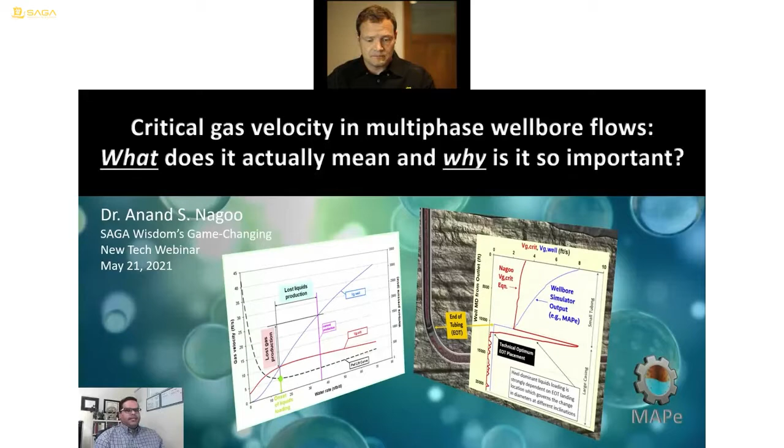Today I'd like to share some fairly deep insights into a topic I've been in love with for quite some time now, critical gas velocity, and focus on some key multi-phase flow concepts that I believe is missing in the current understanding of critical gas velocity modeling. Hence the title, what does it actually mean and why it's so important. I'd also like to thank SAGA Wisdom for selecting us as part of their game-changing tech.

For the first part of the talk, I'd like to focus on what are some common misconceptions about critical gas velocity. Then I'll transition into why this improved understanding is important, and conceptualize and validate our understanding with some key experiments and field data validations. Finally, I'd like to introduce you to the tool that does all of these calculations of multi-phase flow, these automated production calculations of multi-phase flow and critical gas velocity and so on, the MAPe tool, and why it's an exponential technology for providing new insights into production optimization workflows.

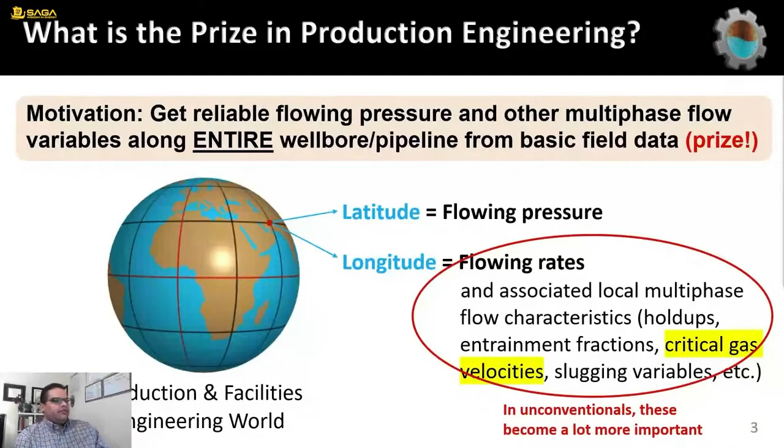What I like to do is step back and look at the prize of what we're trying to do here. In production engineering, we think about this world in terms of the latitude and longitudes of pressure and flow rates. What we're really after is trying to find out that pressure profile along the well, those individual multi-phase flow characteristics along the well. Particularly in unconventionals, we're interested in things like slugging and critical gas velocities and holdups and so on.

But if you really think about what the pressure profile is in a well, it's nothing more than a representation of what you have in the well, the volume fractions of the phases. And all of your flow patterns are just different types of manifestations of what you have there. So the pressure behaviors is governed by the volume fractions, and the volume fractions and the individual phase velocities collectively - that relationship is what we call the well slip behaviors. That's the key thing that's actually causing you to see the different types of flow behaviors in the well, whether it's a slug flow or an annular mist flow or so on. And that's what you see visually represented in your slip, in the types of slip that you have.

Now, the problem is that there's a misunderstanding, in my view, of what's actually happening. When we think about concurrent multi-phase flow, the gas is not actually removing the liquids. What's actually happening is that there's a constant slipping between the gas and the liquids to various degrees, which we call different flow patterns, and we call that holdup. The liquids will be held back due to that slippage in concurrent flow. But in countercurrent flow, when you have partial or full countercurrent flow, you have both slipping and liquids falling back downwards.

That's a key difference because you need to have a deep understanding of the two different types of wellbore slip behaviors, characterized by concurrent flow and countercurrent multiphase flow. This is really where we must start to understand critical gas velocity, because you cannot understand the concepts of liquids flow reversal without understanding the differences between concurrent and countercurrent multiphase flow.

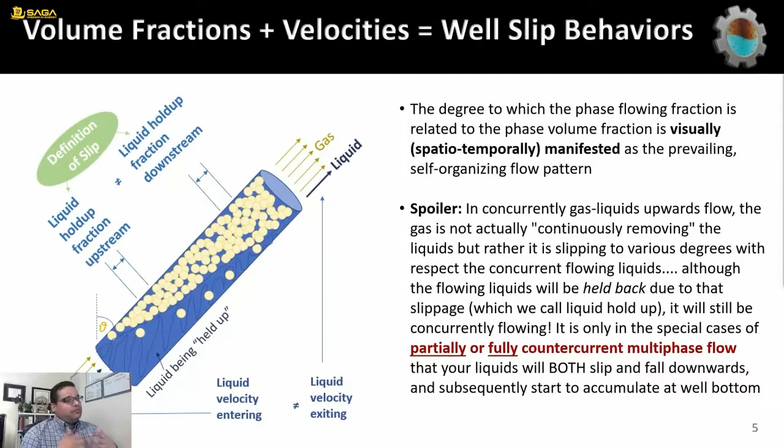There's a large body of literature on both, but we tend to see more of the concurrent part in the petroleum industry. This is what has always been missing before, and it's a key source of misunderstanding.

When we talk about concurrent or countercurrent multiphase flow, we're always talking about liquids accumulation. In concurrent multiphase flow, the liquids accumulate in all sections of your well, and you have this phenomena of the liquids being held back due to slippage. So you have liquids slipping but not falling, with both a positive liquids rate and a positive gas rate. That's how you develop a holdup profile.

But in countercurrent multiphase flow, you have a new phenomenon, because now you have accumulation due to liquids slipping, still holding up, still slipping, but now additionally falling. You're going to be building up a static gaseous liquids column at the bottom of the conduit. And that's really the source of confusion.

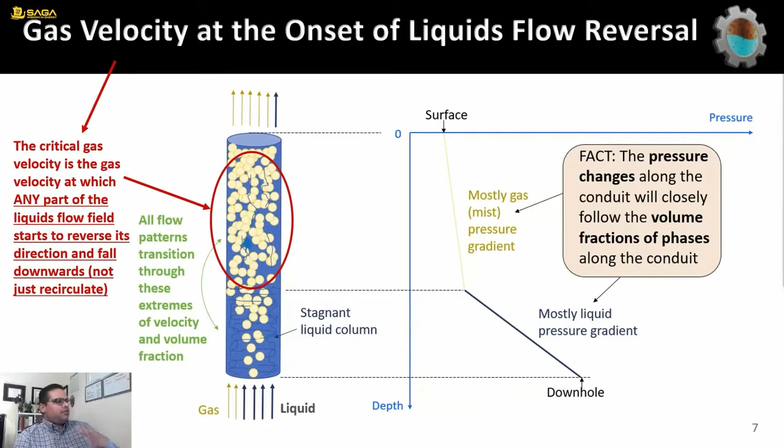So now that we understand that, we can finally come to an accurate definition of critical gas velocity, which is a gas velocity at which any part of your liquids flow field starts to reverse direction and fall downwards, not just recirculate. We're talking about falling downwards. It's a gas velocity at the onset of liquids flow reversal.

But even that is open to interpretation, because what do you mean by any part? If we start from concurrent mist flow and decrease the gas rate, we're going to countercurrent multiphase flow in many different ways. Are we talking about a partial fall in droplet mist? A partial fall in annular? A mixture between? The answer is the critical gas velocity is all of the above.

It's a range. Contrary to popular belief, it's not a departure, but a range. It's not just a point, it's a wide range. It includes all of the starting options for countercurrent flow.

The critical gas velocity depends on the different types of wells you have. For example, a high GLR mist flow well will flow in this regime, but a liquids-rich gas condensate would flow in a partial churn annular flow regime.

The critical gas velocity is the onset, that point just before you transition to zero cross-sectional average net liquid velocity, and then your liquids start to have a net zero velocity, a net negative velocity. All of this happens in multiple ways across a wide range of different transitional flow patterns.

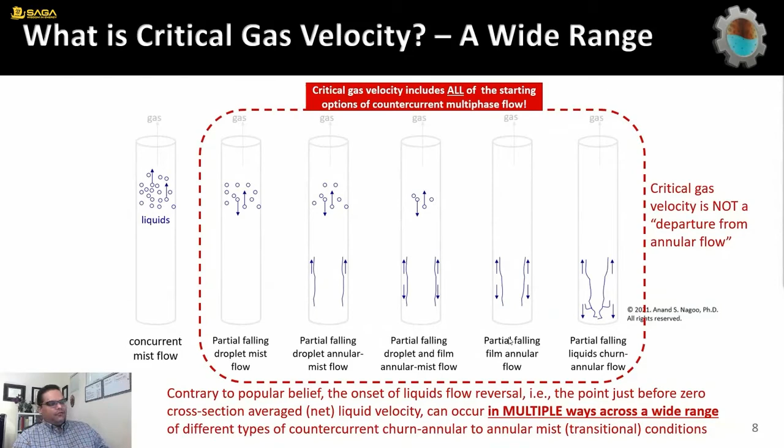That's important because now we can finally understand why we have slow liquid loading in some wells, and sudden, fast liquid loading in other wells. That means we're accounting for the full range of liquids loading, and that's an important differentiation into what we understand by liquids loaded.

The difference in understanding that I created in the critical gas velocity model I have is that we're able to combine that full range.

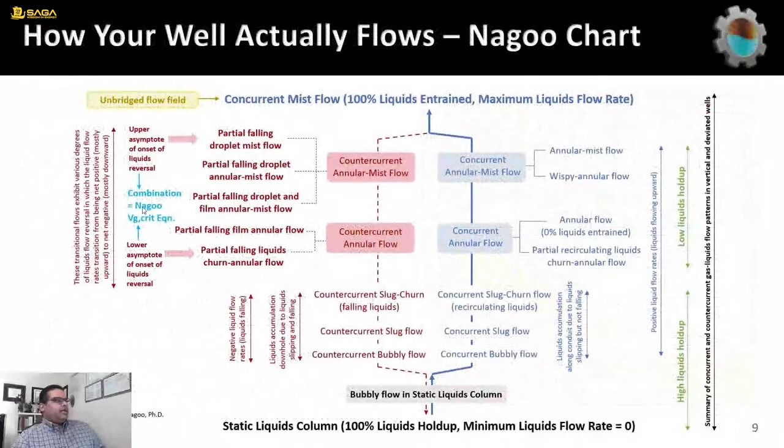We're able to capture that full range and look at the upper asymptote of liquids loading and the lower asymptote, and combine them. So now that you understand what liquid loading is, you can clearly say what it is.

It's not the onset of flooding. It's not the liquids droplet only. It's not the liquids film only. And it has nothing to do with the change in pressure gradient curve or liquids accumulation and so on, because once you have accumulation, you're already past the liquids loading point.

So now that we understand what liquids loading is and the onset of flow reversal and countercurrent multiphase flow, how do we conceptualize that understanding into a method, a calculation? And that calculation is very important.

It's one of the most important calculations if you're talking about the eventual removal of all of the liquids in your well, which is what the definition of artificial lift is.

I've been using this new understanding in my critical gas velocity equation, called the Nagoo equation, in many different ways. I have new methods coming out for a virtual wellbore liquids meter that uses this calculation, a real-time plunger rise velocity tracking algorithm, slugging detector for automated gas lift, and so on.

But the most important application that we should care about, the holy grail, is if we can predict early liquids loading detection and diagnosis. Cost effectively managing your wells means that you want optimized remediation and intervention responses, in response to better quality and timeliness of liquid loading prediction.

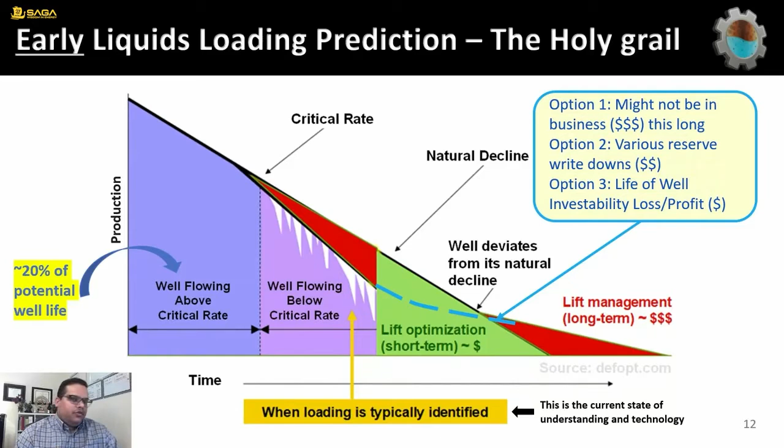You might not be in business that long. Your investability equation might change, and you might have to write down reserves.

It's something to get right because we don't only want an analytical, explainable, simple, first-principle derived model, but more importantly, we want an inclination and diameter dependent model, and we want a liquids loading calculation that predicts early liquids loading that includes the full range of liquid loading.

And those things are particularly important for unconventional wells. That brings me to this equation, the key new equation that I came up with.

It's a collaborative study, SPE 190921, and it's the industry's first full range liquids loading model, and to my understanding, the only full range liquid loading model that has explicit dependencies on diameter and inclination.

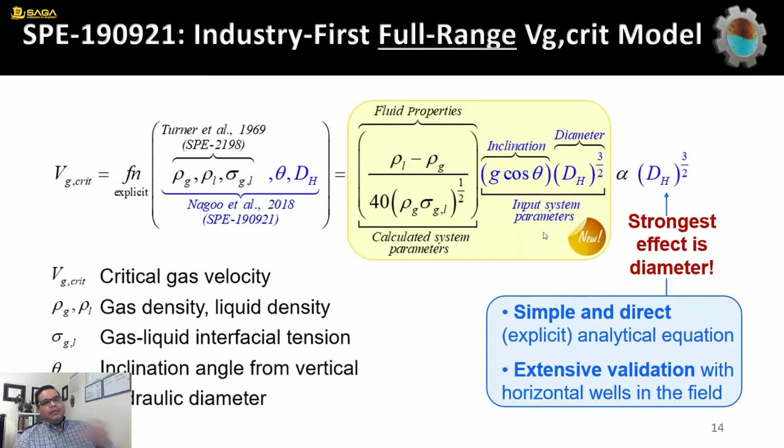And it turns out that diameter is the strongest effect. It's well validated against many shale unconventional reservoirs.

And when we talk about full range, again, just a reminder, we're talking about all of this partial countercurrent flow, that onset of flow reversal.

That's very important to remember, because any amount of liquids will load a well, not just a lot of liquids or a little bit of liquids.

And if we have that understanding, now we get that same equation as this red line here. And if you compare that with your gas well velocity...

You can begin to use this simple analysis of these two different profiles to find out a lot of things that's going on in your well.

So for example, you now have a technical, quantifiable, explicit calculation of where your end of tubing should be from a technical standpoint, not necessarily from an operational standpoint.

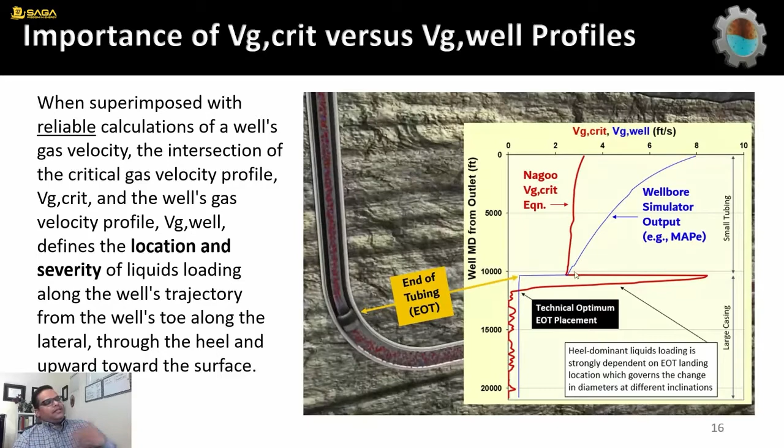And you begin to see which different parts of your well have liquids loading, and that complex interaction between the fluid dynamics around the bend and so on.

And it's not just individually within the well - you can use this critical gas velocity and well gas velocity and plot it for the life of the well.

So you can look at your life of well liquids loading and calculate precisely on a lift curve where you have your onset of liquids loading, and therefore you can now quantify the lost liquids production and gas production that you can get if a well were to load.

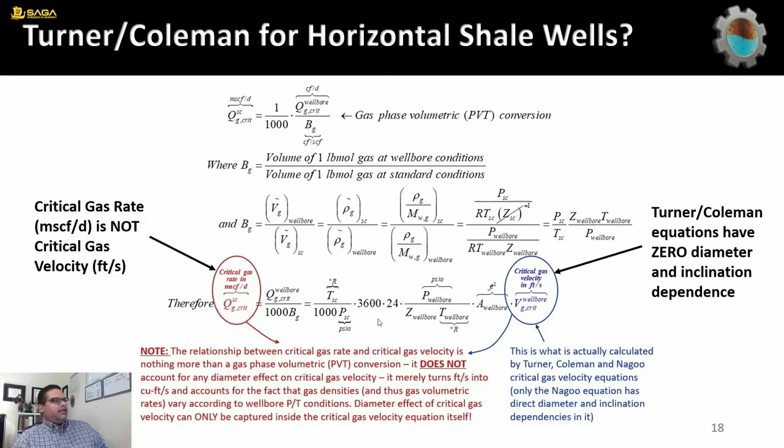And this is a huge advancement beyond Turner and Coleman because, as you know, Turner and Coleman has zero diameter effect and inclination dependence in the critical gas velocity equation. But what we typically see is the critical rate equation, which is the PVT conversion of that, and we sometimes get confused with those two things.

So what's the best way to test our understanding, or improve understanding, is to look at very simple cases, both field cases and lab cases, of observed onset of flow reversal, right?

Here's a University of Tulsa experiment where the gas velocity was systematically reduced until the liquid loading was observed. And if you didn't have the Nagoo equation, which is the red line, to correctly capture the liquid loaded observation, you would still be above the Turner line and so on.

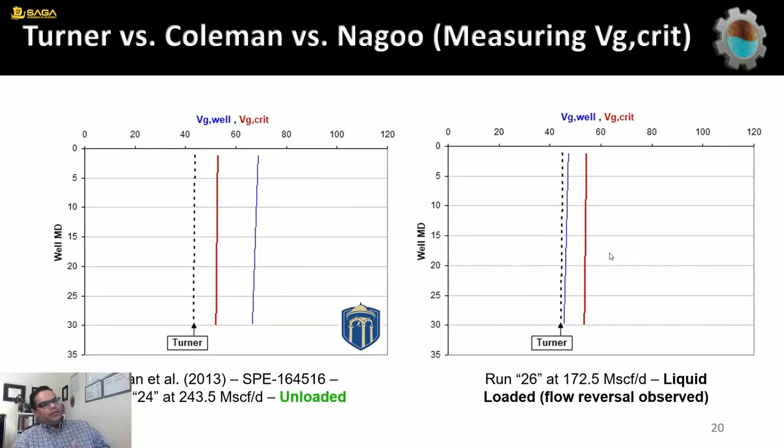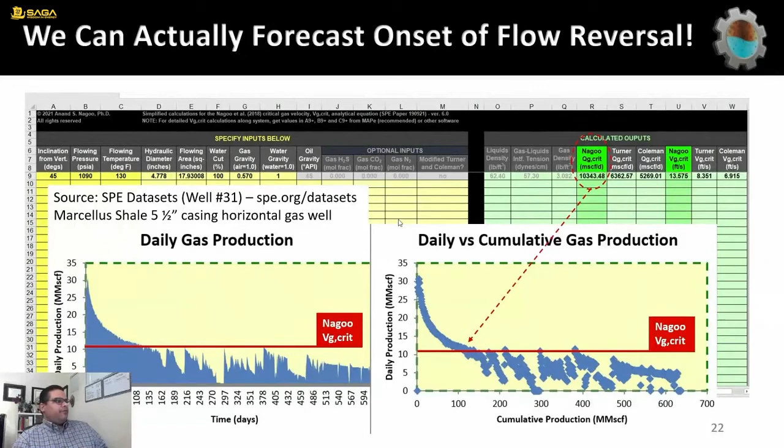For example, this is a SPE dataset that they recently released. And you can clearly see there's a huge difference in the Nagoo equation and the Turner and Coleman equations, and you can capture that very precisely. So you can finally forecast critical gas velocity and onset of flow reversal.

And it's not just US wells as well. There's a lot of different papers, different types of diameters, sometimes very large diameters, that you can finally get this thing correct in terms of the actual observed loading.

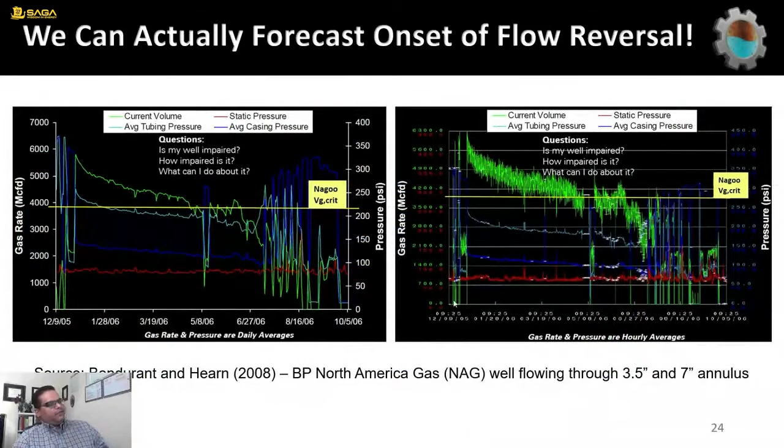And there's a continuing effort. This is an independent validation of the Nagoo equation in a BP paper. And just to keep in mind, there's also the annulus multiphase flows as well, types of validation.

So beyond prediction, there's diagnostics, so you can diagnose what's going on downhole, and you can see the differences between slight loading and severe loading.

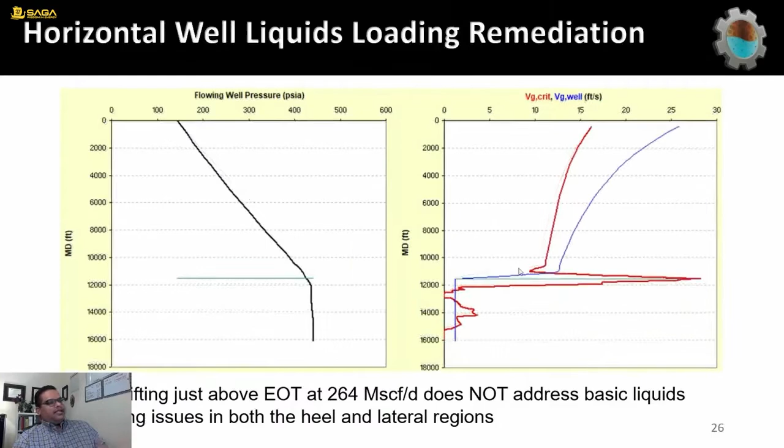In terms of remediation, you can apply gas lift. So in this particular Eagleford three-phase gas condensate well, water well, the gas lift, when applied, didn't really solve the liquid loading and the lateral loading.

And of course, there's the tubing calculations that you can make as well, and you can find out precisely at what angle your different critical gas velocity would matter.

My final portion of the presentation is to introduce you to MAPe. MAPe stands for Multiphase Analytical Prediction Engine. It's the V7, it's the newest version. There's a lot of things that's changed.

In case you missed it, there's now the possibility to run thousands of wells, all of these different wellbore simulations very quickly. MAPe is all about 80-20% workflow optimization.

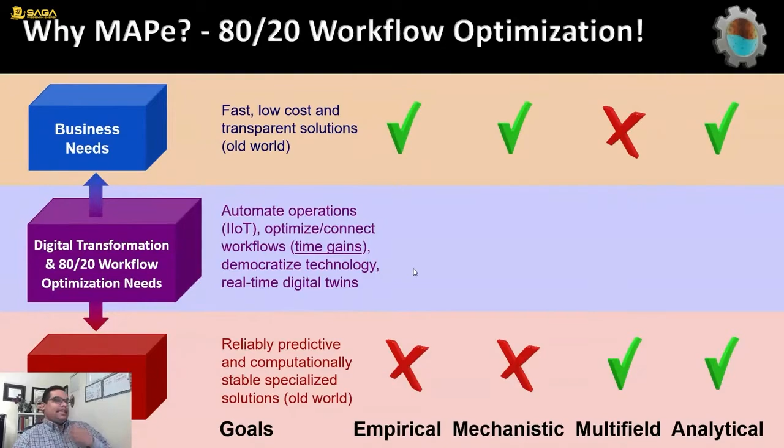So we used to live in the world where simple correlations or niche calculations was important, but now we live in a different world where the technology is only a part of the bigger picture, and automation and the time gains from workflow optimization really matters, and that's why you need analytical tools.

And automation means democratization as well. So the difference between MAPe and other codes, it's the VBA code is all open. It's a huge head start. So you can think about it as a Raspberry Pi of production software.

It's a canvas. And what I'm focusing on my time on these days is just making a lot of MAPe YouTube videos showing how to use these automated calculations.

So it's important to keep in mind that, yes, you can solve everything, throw the kitchen sink at everything, and take a bunch of different wellbore models and combine it together. But the real value, if you don't understand what's going on a well by well basis, combining those things doesn't really add value. You actually decrease value.

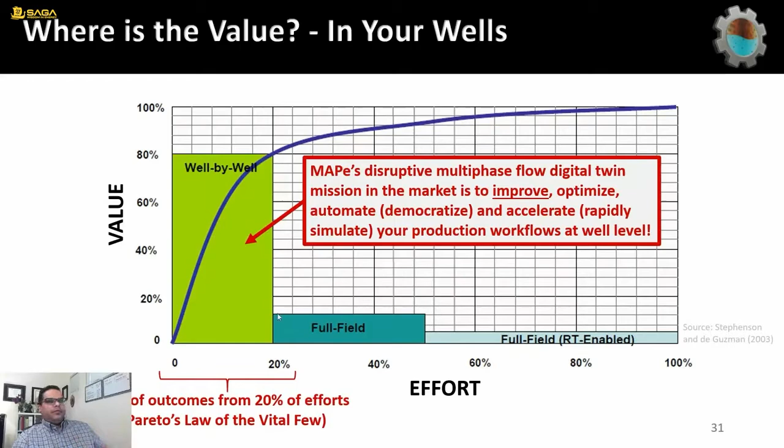So MAPe's disruptive mission is to improve and optimize and automate those production workflows at the well level. And the improvement comes both from the fundamental deterministic theory, as well as, in many cases, MAPe's technology far exceeds what you have in the industry right now for individual things.

It would be remiss of me to say that MAPe also has a lot of unique things that are based, also has the world's largest validation database. So it's many individual things and incredible things all coming together to make a disruptive advancement in analytical, automation-friendly production workflows.

And that's that, in combination with a much better understanding of critical gas velocity, is how we're going to have a baseline understanding for science-driven production optimization.

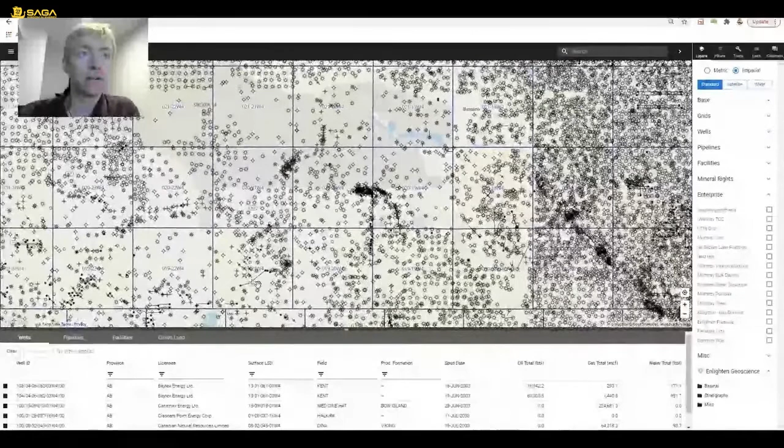Today I'm not going to try and bore you to death with a list of features and data sets, but as background, Petro Ninja is a web-based technology with oil and gas data across Western Canada and into the United States. You can get it at petroninja.com. You can see production, documents, and a fair bit of it you can actually view for free on the free version. Exports, filtering, lists is kind of where it turns into a paid account.

But the larger vision of Petro Ninja is not that we can be another data provider competing in that area, because there's an area of interest to me that's a little bit more personal, and certainly a part of my experience when I worked in industry.

I used to work for a producer, and I started off in Medicine Hat, kind of in the field. I went to Calgary and got to see and work a lot more in the Western Canadian Sedimentary Basin, in different roles like completions and facilities. But what was common in all of that is how much data wrangling there was for almost any task.

Just a couple examples I'll go through. If I wanted to forecast a well, I always need to go into my data application, my mapping tool, pick my well, export it, load it into my economics and forecasting system. And that wasn't always synced in the future, so if I wanted to come back and do material balance or re-update my forecast, I had to usually go and get that same file, pick that same well again.

Another example: if I was part of a reactivation project, looking to reactivate a well, I might need like 10 or 11 applications open. I might need to talk to 4 or 5 other people because there's quite a few different disciplines involved. I might want to know what's downhole, what kind of tubing we had, if there's a pump, and where did we used to run it, to what depth.

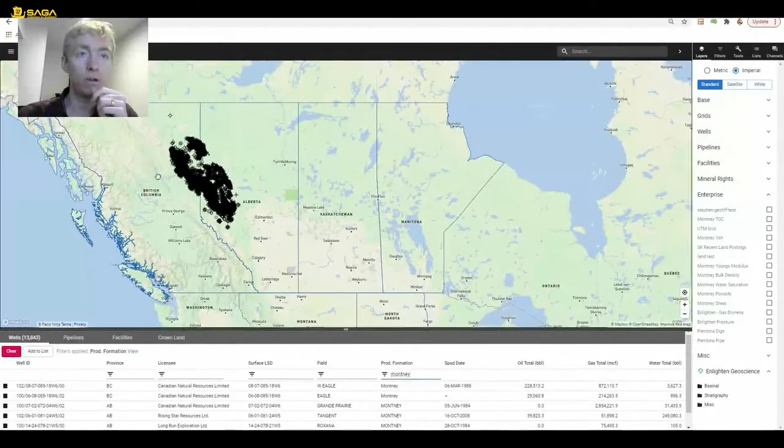But what do I know, being some foolish engineer? Frequently I'd always be working alongside a geologist. Before I got too deep into well comparisons or asset evaluations, I'd want to understand some of the geology.

What we're working on is, how does that geologist work better with the engineer? This product is a shared workspace at the enterprise level, so the geologist and I can actually be on the same map. Further to that, the geologist can upload layers that I can see.

For example, one of the products we're integrating with is SeisWare, and they have a new geology module. One of the things they did for this presentation is they took the Montney 3D model and made some layers. Right now we just upload them, but they're automating it so that soon you'll be able to push a button and push that layer to Petro Ninja for a presentation view.

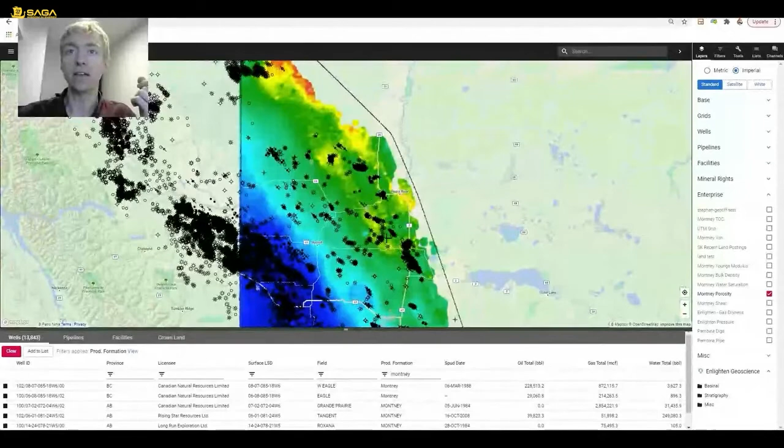So if we turn on, let's say, the Montney porosity - this is just in Alberta - we can see the wells on top of this layer that was built in SeisWare. We can play this with a couple of the other layers they prepared, but it's helpful for an engineer to see where these wells are falling.

We could further filter this. Let's say we're just wondering, where are the wells from 2018 being drilled? So 2018 to today, where are we seeing activity? We can see it's primarily on this fairway here. You don't see as many being drilled up here. Again, geologists are probably batting their heads against the wall at this dummy over here, but you get the idea.

The geologist is adding data, the engineer is able to play with this, the land management is able to play with this and the wells on top, without any complex queries, without anything difficult like that, just to overlay them on the map. The whole process involves no importing and exporting or anything like that. It's going to be a button you push that goes from SeisWare to Petro Ninja - you overlay this file privately to your account.

Beyond that, I can add lists. Since we're on the shared workspace, the geologist and I, or the land person and I, or anybody else in operations, I can create a list of wells and save them to our shared account. So if I wanted to add this, I could say Montney wells or Montney activity since 2018, and give this a color. If I'd like to share this with our whole company, I just toggle this on and click create.

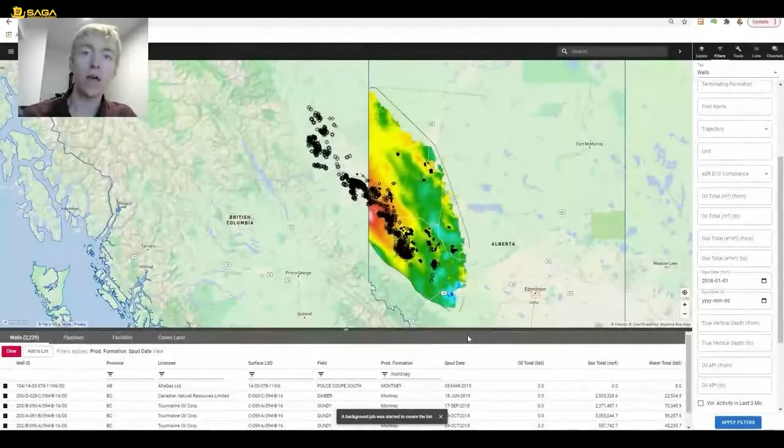And now the whole company, when they come to Petro Ninja, whether they're on their mobile device or on the web application, will be able to turn this on just by selecting this button here.

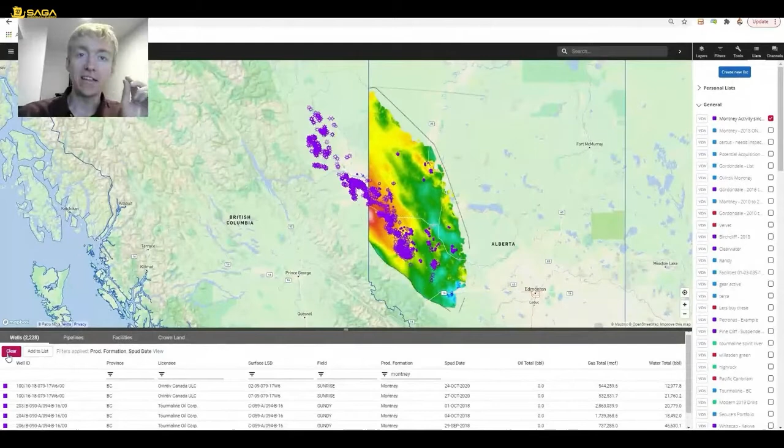So what we're highlighting there again is Sizeware talking to Petra Ninja, and what that's trying to solve is how the geologist and the engineer work side by side, or how any two people in the business trying to work with spatial data together can share files and data in the same interface - so you're not exporting pictures or Excel spreadsheets, and since we may not be able to sit around a table and look at a map as frequently if more teams are remote, this becomes your digital table where you can layer over all kinds of different plans and data.

So one of the other examples - not only do we look to tie in software applications like Sizeware so that it's integrated, but also other proprietary data sets.

Our friends at Enlighten Geoscience were involved in a study, and I'll link to this study. I think it was on the middle Montney, but this is a gas wetness map - the green is a bit wet, red is very dry. Again, all the details will be in that report I'll link to, but they were able to push this layer for us to add onto Petra Ninja.

Now we can turn on our layer of Montney wells drilled since 2018 and see where these are falling. Big surprise, a lot of it's either in these oil portions or some of the wet gas. But if I clear all this, we can see as we zoom in, there has been typically a fair bit in the dry gas that was drilled—just not over the last 3 years.

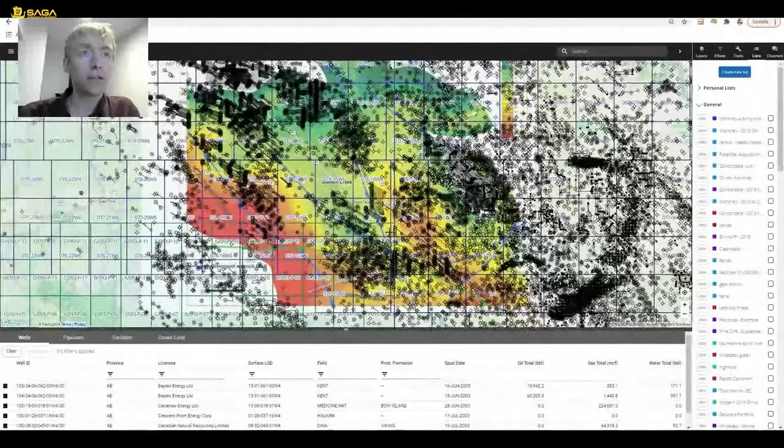So that is an example of a data provider that has data accessible to Petra Ninja as just a layer you can toggle on and off, so you can kind of jumpstart your Montney project and understanding, by using other proprietary data sources without having to figure out how to work with a study—whether it's just a PDF document, or how to connect it back to the data of what this well is, how it was drilled, what we know about it. Here we can find pressure data, well logs, gas analysis, and everything else.

So this was an example of how we could turn on a layer that was provided by a third party, Enlighten, who was involved in this study.

We also help companies tie in their data sets. So if we take an example, going back to poor old me trying to reactivate some old stripper oil well that was pretty marginal, needing to look at the accounting and project, do my forecast, and understand the mineral rights and all that kind of thing.

What we've done with quite a few of our customers is connect to their SCADA or daily production information, so as you click on a well, your company can view whatever data you have there. If you connect your accounting information, you can see what your net operating income is and what the fixed and variable costs for this well have been over the last couple of years, which I think is very valuable for field operations to understand where the money gets spent and identify cost savings opportunities.

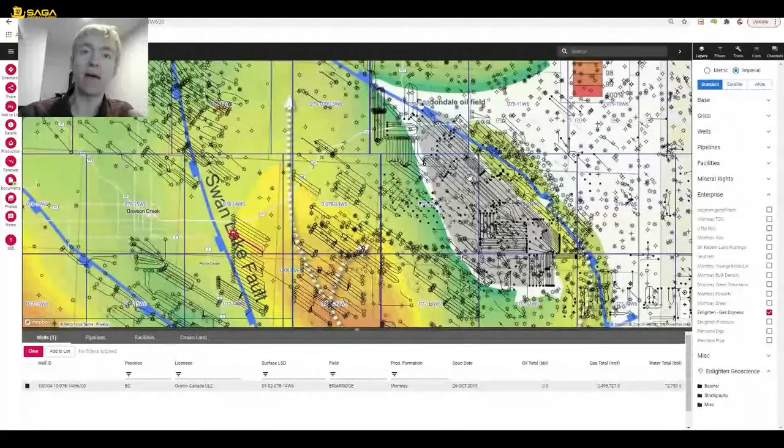Adding in land systems and a few other things like your DOIs, so you know everything about this well and your well's on the map. You don't have to have 10 applications open.

But the final data wrangling thing we're going to talk about, which actually leads into the next presentation by Subsurface Dynamics—another company developing on the Petra Ninja platform—is how you can click a button and launch a tool.

The tool we're going to focus on today is Subsurface Dynamics' Athena, which allows you to forecast. You can send a list of wells or a single well. If I just select this well, we're looking at the production chart and wondering what this well is going to produce cumulatively, or what's the EUR.

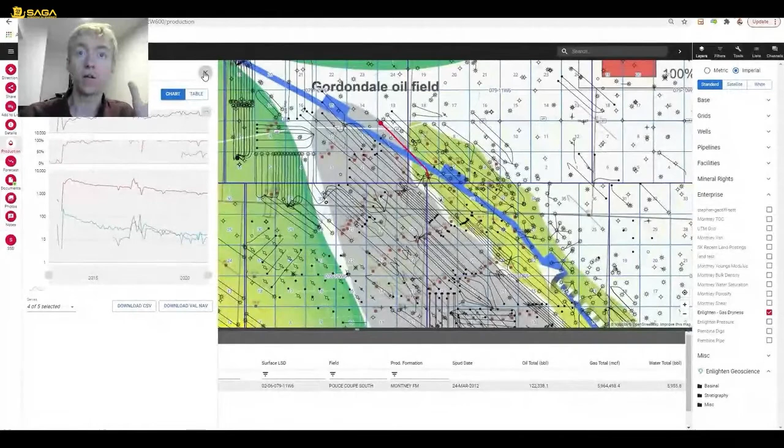If I click the SSD button here, it's going to throw this out into a new window, a new application. It's going to generate the probabilistic forecast. I'll be able to play with it here, and say, actually, that looks like a pretty decent forecast. But I could further change some of the different values and enter in different economic variables. The whole point is that I didn't have to export and import, I didn't have to open another application, and I was able to do this all on the web with a push of a button.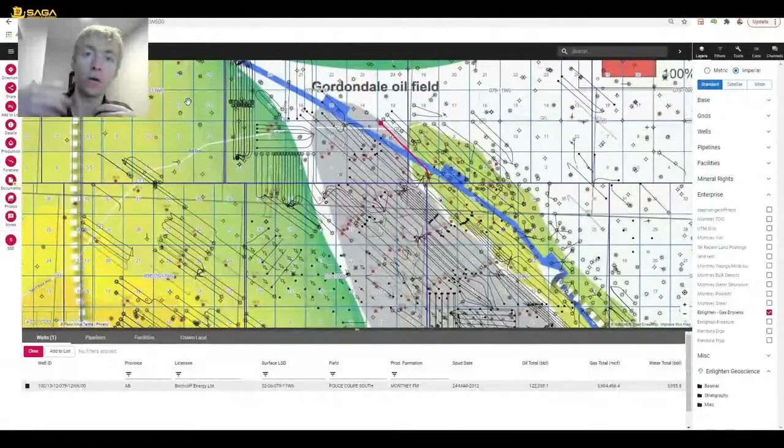Subsurface Dynamics is going to take some of this data and launch a case study on how they can use this workflow to identify opportunities, probably in this Montney area. But I wanted to show this idea again of what we're trying to do: take away that friction, so if I'm interested in this well, I might have geological data to overlay and see it's crossing a fault, part of the oil pool, the Gordondale oil field. I could click on the production and view all the public data, all the well details from gas analysis and pressure.

And I could also go to documents here and see, you know, we've got well test for pressure data, fluid analysis, directional surveys, logs. But if we have our own data, I could also view that. So maybe I could view today's production, today's pressure, and then I can click a button and start to look at what this well is going to generate the company in terms of cash flow and in terms of reserves, whether that's a single well or a group of wells.

And I think that's the story we're trying to get at, is how can you give your technical team the tools and the workflows so that they can spend more of their time actually working with the data, not on the data, but understanding, trying to gain new insights, make decisions, not all this time wrangling data and trying to move it around and reach out to 10 different departments to understand what's going on.

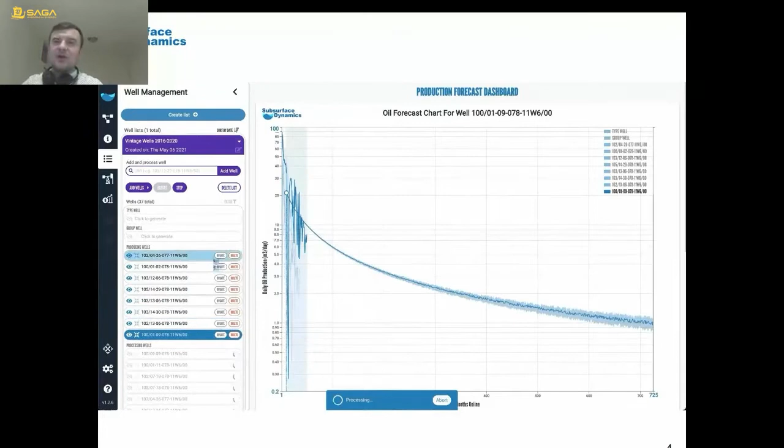I'm not going to talk about features and capabilities, just quickly show the workflow. So you can grab any well list from the Petro Ninja and directly throw it into Athena. You can process all the wells. By default, it will grab the government data set, but if it's SCADA connected, it will grab the high resolution data, which can be daily, hourly, minute, as dense as it's being recorded.

From here, you can take on any type of workflows you want. You can pretty much go through your wells, QC them, look at the forecasts, play with the scaler, see how it will look better, if there are any problems with the wells.

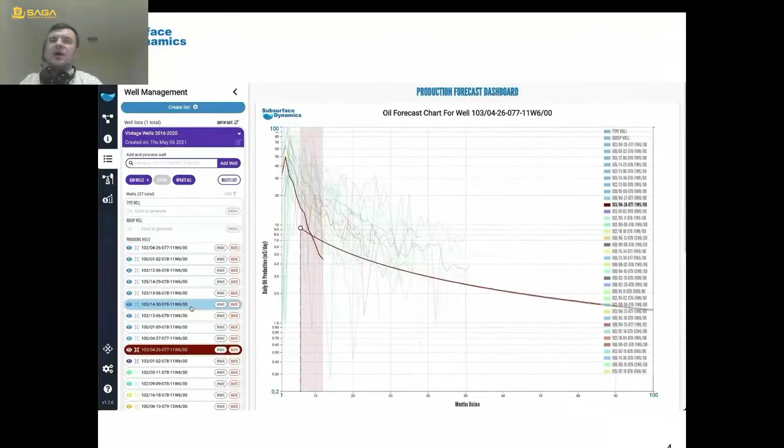Then if you see any bad forecasts, like this example over here, you can go to the production forecasts and adjust those properties either manually, or you can use the auto-fitting algorithm and just lock certain properties. It could be decline rates, starting month, ending month, and so on. You can automatically apply to all your wells.

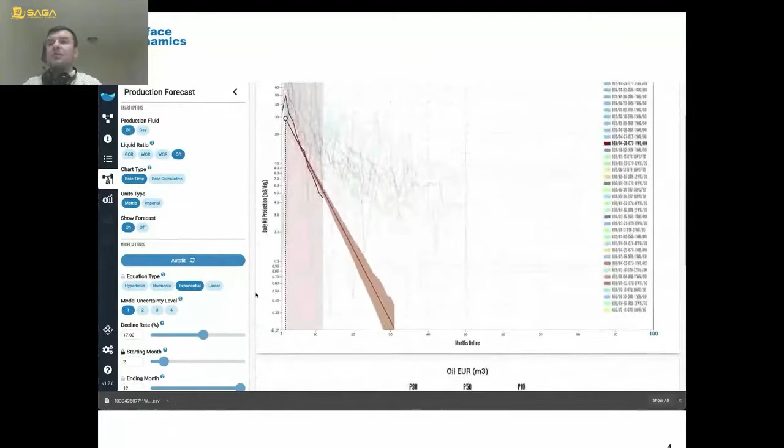So as basic outputs, you get all your EURs, you get all your production forecasts. You can export them, switch to different views, switch to different fluids, look at your GORs, water-oil ratios, and so on. So in general, it has all the basic capability required to perform the daily tasks.

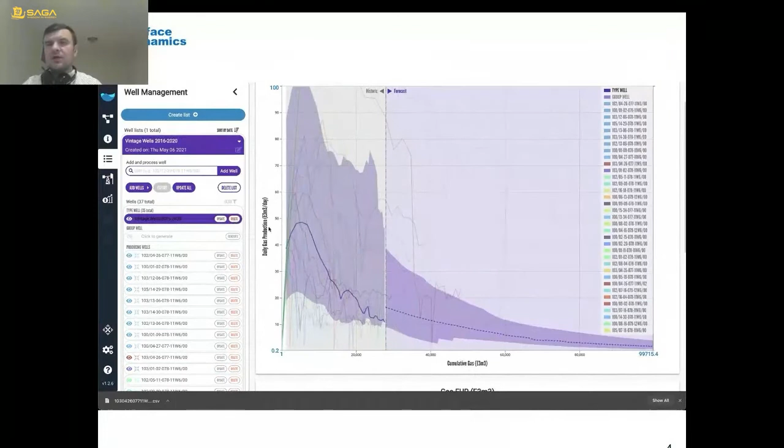After you're happy with your forecasts, you can go to generating type wells, or generating group wells. All this is done on the fly, on the cloud, so you don't need to do anything. There is no requirement for additional hardware, software, or anything like this. It's pretty much all web-based.

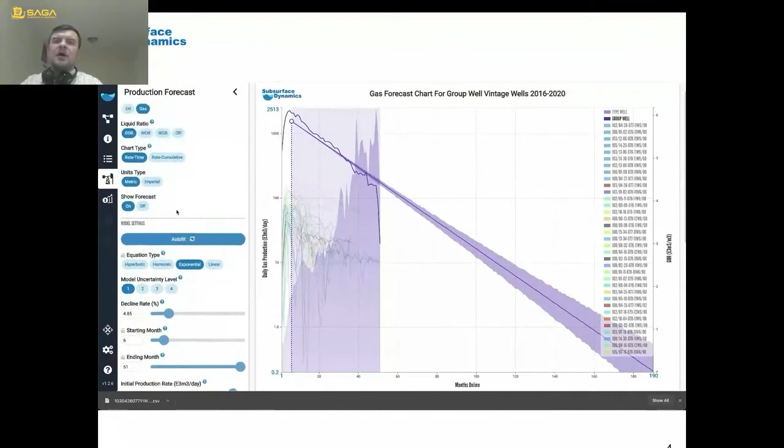And then if everything seems to be in order, you can go to the economic forecasts. Over here, it gives you the opportunity to change your economics parameters, play with your cutoffs, play with your price decks, play with your commodity prices, royalties, OPEX, CAPEX, and so on.

So for the clients that have SCADA integration, we can actually grab this data directly from their internal databases, so they don't even need to worry about anything. Each and every well within different vintages will have different values for the economic analysis, and they can be automatically integrated into the workflow.

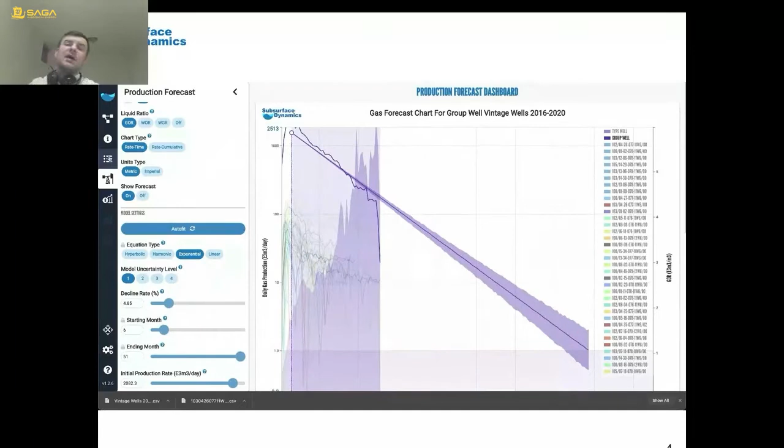On top of that, the economic analysis itself can be done on the type well, group well, or single well level. It can be done for the whole production period plus forecast.

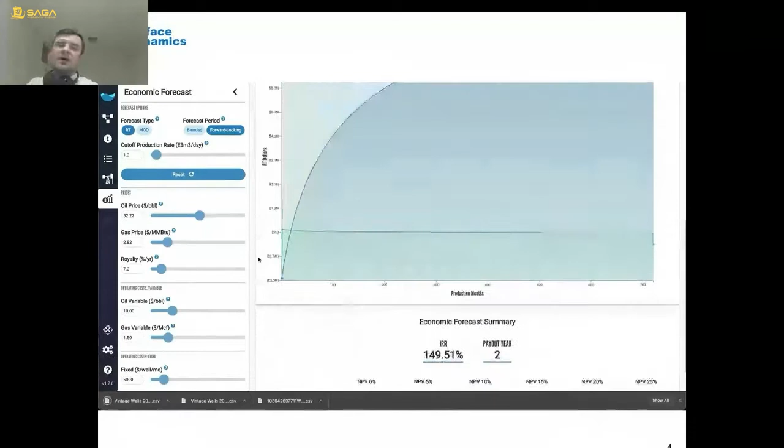On top of that, if you want to do any type of forward-looking modeling, you can easily switch to this mode and play with your parameters to see how it works, and if it actually makes sense to do workovers or any other additional things.

Going back to the case study, so I showed the basic capability, and it's kind of available - the demo version is available for free. You can just go and log in through the Petro Ninja website or through the Subsurface website.

But let's talk about the workflow itself and what is the motivation behind all this. As Kevin was previously showing, we were looking at some Montney wells, different Montney vintages and different Montney groups of wells. What this allows us to do, as engineers or business development guys or acquisition A&D guys, is evaluate our assets or neighboring assets very quickly and efficiently. This particular example shows some Montney wells that we analyzed.

So the general workflow would be: you either go into detailed studies, which people not very often do due to budget constraints, or you just go into any available databases and start searching through the wells, previous completions, trying to understand what was done and how you can apply it to your asset - which takes an astronomical amount of time. Nobody has time for this.

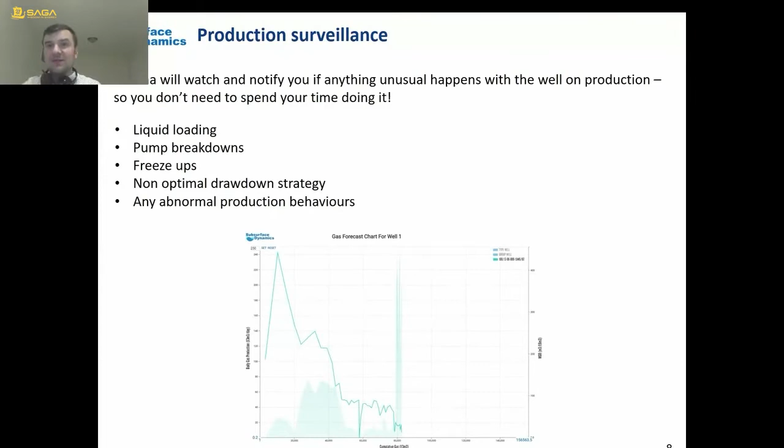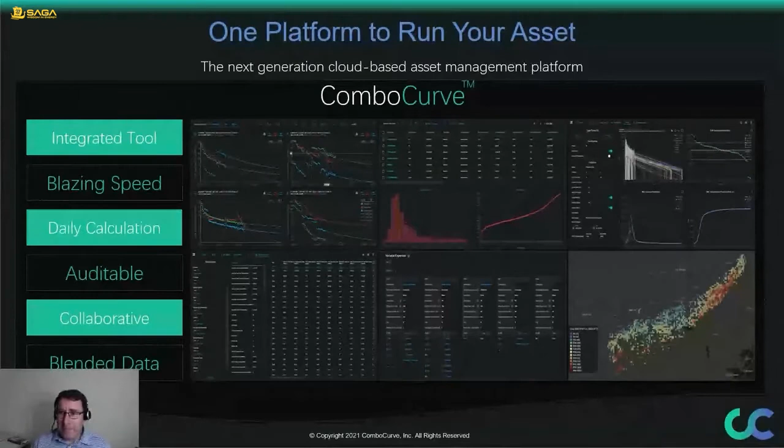That being said, part of this asset management tool is type curve creation, which is the major focus of the talk here today. So you're seeing the four big questions that I really want to attack here in this talk.

When it comes to analyzing production data as a whole, we certainly should and do scrutinize and question everything about analyzing that data. So it's certainly worth mentioning to take advantage of all the information that you have. You'll see that come up here in a couple of minutes. And then keep your ears and eyes open for new methods and new ideas about analyzing production data.

So to discuss the case details, the wells that I selected for the work we're going to look at here today are wells in the southern Delaware. These are all oil wells landed in the Wolfcamp B that have at least 24 months of production.

So what I had done was identify this well set and actually went in and took out some wells that were in the middle. There's actually 42 wells that I removed here from the middle. So I did all my type curve work with the wells you see here on the outside.

And then we're going to walk through the steps of the work that I had done, and then went and applied that understanding of those type curves to these wells in the middle, and then evaluate that, and we'll look at those results together.

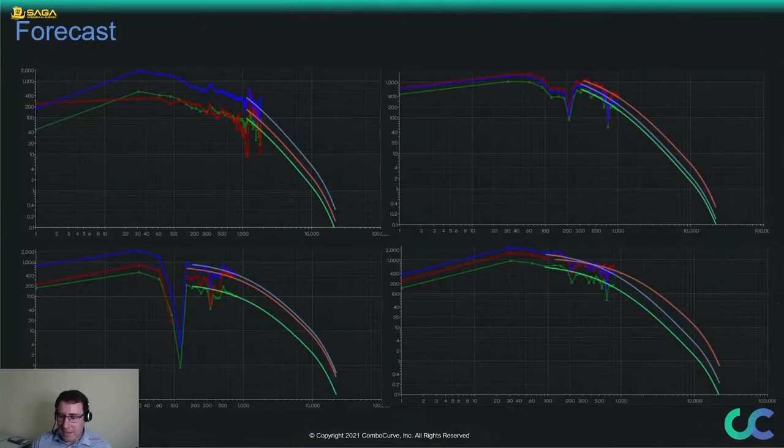So step one, when it comes to wanting to build a type curve, it's a good idea to have your production history, which is obviously important to have that recorded history, but then actually couple that with your best estimate of what the behavior of those individual wells looks like into the future. So really what I'm saying is go ahead and forecast all of your wells, which is obviously easier said than done, because when it comes to forecasting there can certainly be a lot that comes into it. And the impact of how you choose to forecast your wells is certainly going to be an important key when building your type curves.

So what I mean by that, just to pick on a few of these categories, is the forecast type. Do you want to do a rate-time forecast, rate-cum forecast? Do you want to forecast on your ratios and then use those to calculate your secondary phases? When it comes to creating your type curves, even if just looking at one phase, you still need to create your type curves for all your phases. Everything that comes out of the well is important.

So then the actual model that you want to choose, right? There's certainly a large number of models out there and available. So then which model do you want to use to go ahead and fit your production data to create your forecast? Selecting the duration of how much time, if not all of your data, how much of your data do you want your decline curve to fit to?

And then inside that data range, maybe you have to decide what you want it to look for, because there could be a lot of things happening inside that data range that you'd want to identify. Even little niceties like being able to put additional emphasis on which parts of the data, after you've identified it, do you want to emphasize. So a lot of things go into forecasting your wells.

But once you've got your forecast built, it's nice to look at your well set a number of different ways. So you've got rate time, cum time, here's your EUR well collection. Being able to cross plot by a number of different options, or maybe even take a peek at the map. All of these different ways of looking at your data help identify wells that maybe you don't want to include as part of your type well. Maybe something sticks out that's not as analogous to the type well as the rest of these wells, so you just remove it right from here.

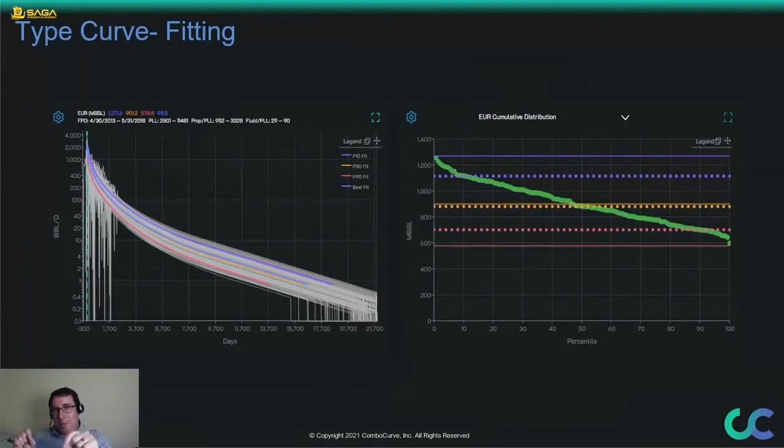Or even if I go to manual mode and stitch together multiple individual segments to build my own type curve, I like finishing that work and then coming in here to see what that result looks like. So at the very least, use it as a guide, but if you wanted to, you could just hit the button and it automatically fits this for you.

In this case, I identified my parameter, selected all of my normalization types, and did my fit. I did that for all of my phases, but I'm just showing the one phase here. So here's us taking a look at what those results look like, the actual type curves that came from all that work.

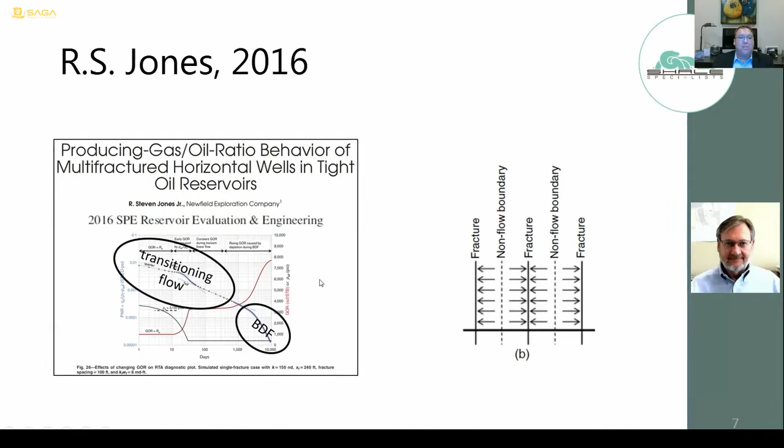Now, unfortunately, comments like that are in stark contrast to sound reservoir engineering principles, such as those displayed by Steve Jones from Cimarex in his 2016 publication, where he was able to history match the observed transitions in both boundary-dominated flow and escalations in GOR upon encroachment of the bubble point.

So it's unfortunate when a CEO makes those statements, because you can imagine the technical staffers being placed under great pressure. I can only imagine what kind of pressure that might be.

Now, DCA is widely used, but it's also heavily criticized. Some of the advantages of DCA center around the fact that it has very minimal data requirements and it's easy to use. Also, there's really no practical alternative for people who need to consider oil reserve estimations on thousands of wells in a short period of time.

Some of the disadvantages are that it was originally intended for boundary-dominated flow in conventional reservoirs. So with the advent of multi-year transient flow periods of shale wells, it is really out of place in its application. Also, it's purely empirical. It was not based on any original reservoir theory.

However, later it was justified to be consistent with theory by other contributors such as Fetkovich and our own Dave Anderson. Now, there are challenges with traditional application of decline curve analysis in shales, and they center around this multi-year initial infinite acting transient flow period that is typically characterized by a very large B exponent.

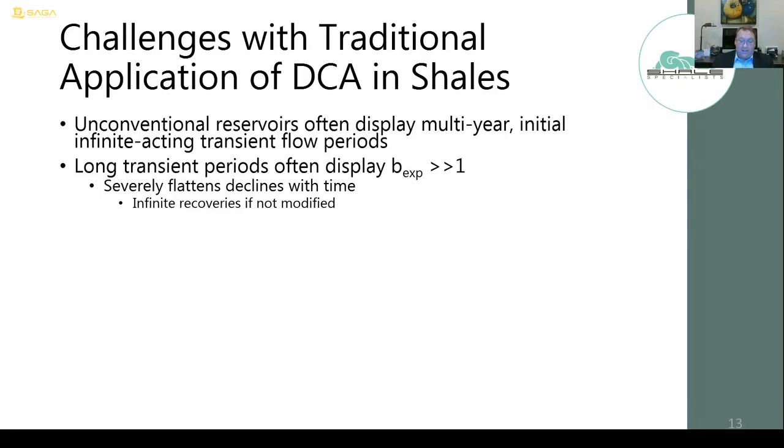And of course, a large B exponent severely flattens declines over time, meaning if you don't do something to modify your forecast, you're going to end up with an infinite oil recovery.

Of course, late life introduction of D-min, or a constant rate exponential decline of 5 to 10%, basically implies that the boundary-dominated flow transition is going to occur decades into the future.

Also, some of the challenges are that DCA lacks any internal mechanism for predicting the transition to boundary-dominated flow, which would be handy given that these boundary-dominated flow transitions are occurring sooner and sooner.

There are other alternatives, such as rate transient analysis, RTA, but they're not immune to this BDF prediction challenge. John Lee has taught us in some seminars to try to overcome these challenges by the use of analogs, reservoir simulation, field experience, and type curves. But he points out that it's very important to control these forecasts.

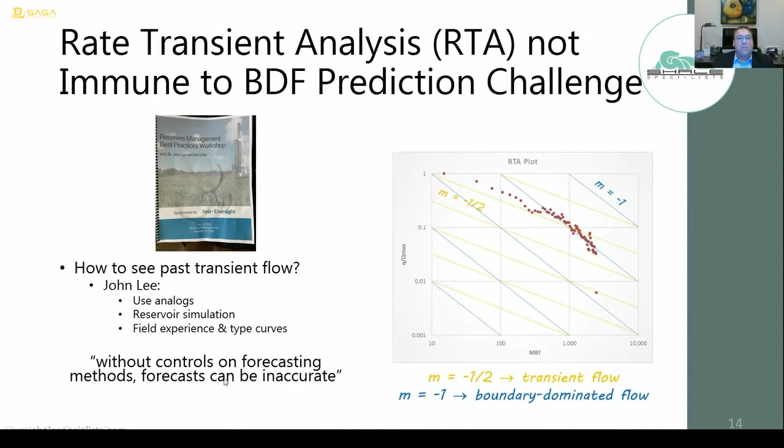Now, it would be fantastic if we could see past the infinite acting period towards the finite boundary dominated period while only having data from the infinite period. And as you can tell, perhaps from the title of my talk, I believe I found such a way, and I'm going to present it to you today.

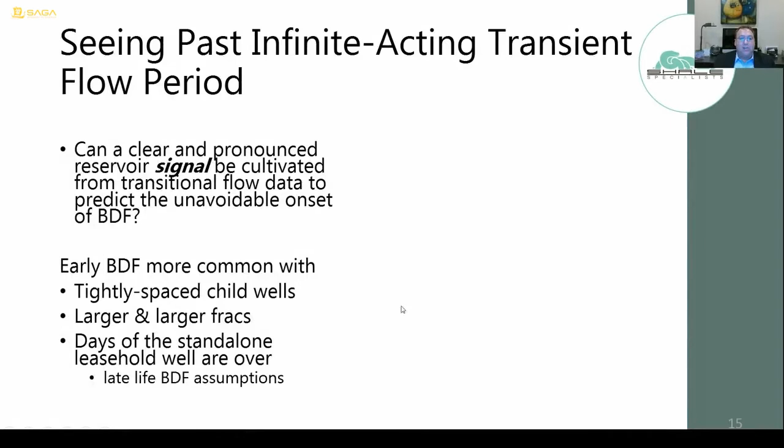And this is specifically important because as we have tighter and tighter spaced wells, larger and larger fracs, we are seeing earlier and earlier transitions to boundary-dominated flow.

Now I'm going to use GOR as part of that signal, and I just would like to hide behind the leadership of Steve Jones from Cimarex for his use of GOR data from transient flow periods to glean information about the boundary dominated flow period, which in this case he was using it to determine oil in place of the drained reservoir volume. So the idea that there exists a signal in transient flow that can say something about boundary dominated flow is not new to me.

So let me organize how I'm going to achieve this. I'm going to compare early time traditional DCA applications with those performed on the full production histories from some aged wells, and these wells will have already transitioned to boundary dominated flow. Then I'm going to introduce a novel reservoir signal incorporating the GOR, and establish the context for my proposed predictive capability within established physics. Then I'll demonstrate how to cultivate and leverage this precursor signal to modify early time forecasts, and then we'll compare the results.

Field case number 1 is a DJ Niobrara well that is fully bounded on both sides with an average spacing of 420 feet, and it was placed on production in 2013.

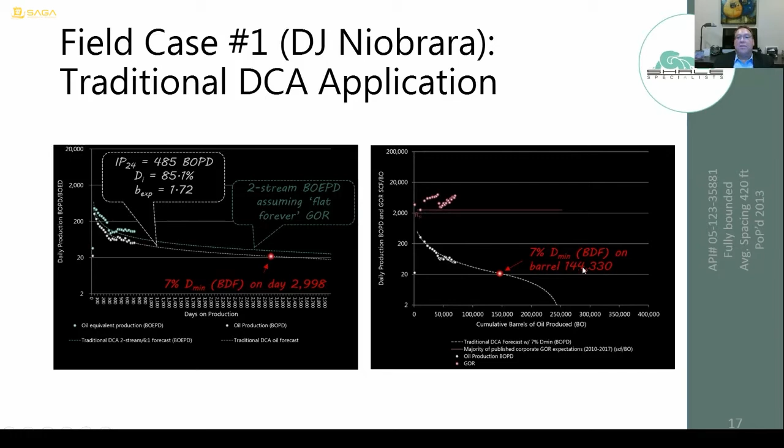I've also included the GOR data and that classic flat-forever assumption used by so many oil companies. And then I added the implied transition to boundary dominated flow from a 7% Dmin assumption, which is like on day 3000 and upon production of the 144,000th barrel.

So this is evidence suggesting we've transitioned to boundary dominated flow. However, when we perform a full history 2-segment decline curve analysis with objective regression, we observe that yes, in fact, boundary dominated flow did occur on day 772, and it manifests as a 27% constant rate exponential decline. This new forecast shows us that we can expect about a 50% shortfall in oil production over our traditional late life BDF assumption forecast.

Case number 2, this is actually 15 wells together as a composite average, from an infamous cube in south central Midland County. These wells are fully bounded on each side. They have an average spacing of 315 feet, 3-dimensionally, and they were placed on production in 2016.

As you can see, here's my early hyperbolic decline forecast through the oil data, and here is the 7% Dmin assumption indicating that boundary dominated flow will occur on day 4000. Now I have taken my GOR assumption of flat forever, combined it with this oil forecast to produce this flat total energy equivalence production. That's why it's parallel, because it assumes GOR flat forever.

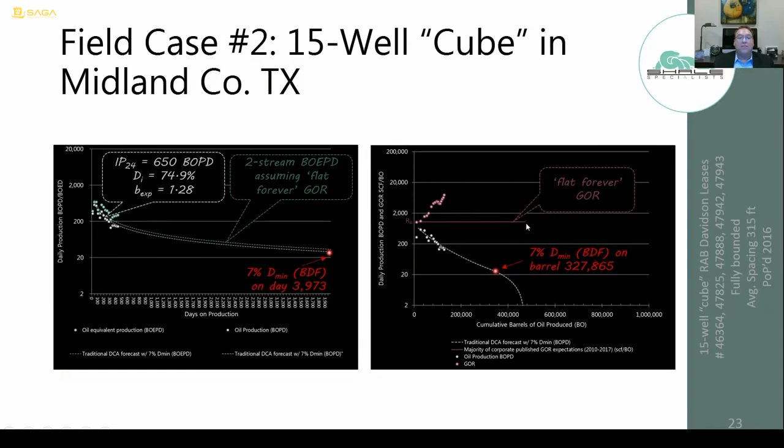If we perform a second segment full history objective regression decline curve analysis, we find out that yes, boundary dominated flow occurred on day 441, and it was manifest not as a Dmin and a B exponent of 0, but in this case as a B exponent of 0.62. Unfortunately, we see that we are going to experience a 50% shortfall in oil production relative to our traditional late life BDF forecast.

And finally, case number 3, this one doesn't have as mature of a production history, but because it's so new and from such a prominent operator, I thought I would include it. These are fully bounded wells in the Midland Basin with an average spacing of 425 feet, all placed on production in April of 2019.

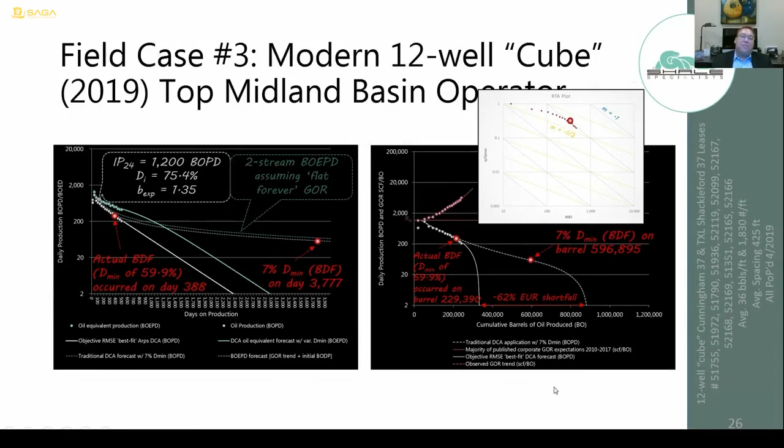That manifests as a 60% constant rate exponential decline on day 388, and unfortunately it seems we can expect a 62% shortfall in oil production relative to the traditional late-life BDF assumption. Now that I've established some cases that have transitioned, I want to introduce the novel reservoir signal and place it within the context of established physics.

Let me start with this question: after we're on production, on reservoir response, on gas lift, or the ESP is set steady and we've cleaned up, can total fluid production from a well ever increase? Well, yes, it can - we see that if we re-energize the system with an offset frac, or if an operator has spare ESP capacity and turns up the knob. But in general, we expect oil and gas wells to decline over time, never increase.

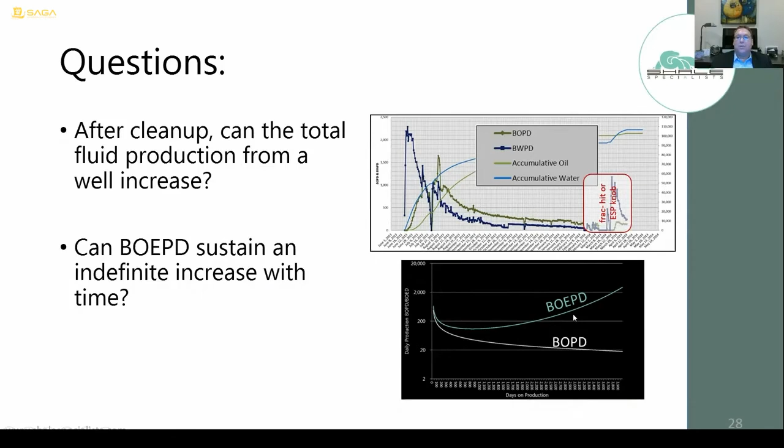Let me ask it a different way. Could we ever sustain total energy production in barrels of oil equivalent indefinitely with increasing time? In other words, if we're on reservoir response in our hyperbolic transitional flow decline period, not adding energy to the system, what would happen to the GOR or oil production that would result in an increase into the future of total energy production from a well?

There's really only one way I can think of that this could happen, and that would be if the energy density of the produced fluids would increase - if the well would get oilier and not gassier. We would need the production stream dominated by heavier hydrocarbons with more energy density rather than lighter hydrocarbons with less. Of course, that's not what we see - we see rising GOR, decreasing oiliness, decreasing energy density with time.

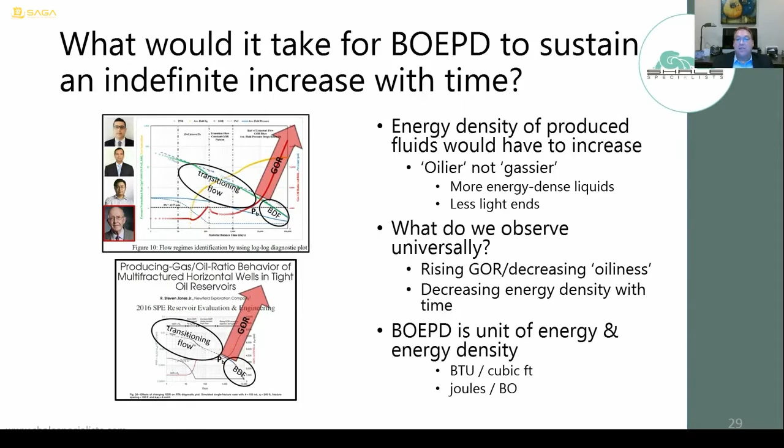By the way, I want to clarify again that I'm using BOE per day as a unit of energy. BOE is a unit of energy, just like joules, BTU, and calories. As long as we agree on an energy conversion ratio, it's a unit of energy. Just wanted to clarify that.

Now, thinking of it in terms of energy, is there any physical law that might restrict an indefinite rise of total energy production from a well while total fluid production is decreasing continuously into the future? The restriction that comes to mind is the law of conservation of energy, which states a system always has the same amount of energy unless it's added from outside. If you consider the entire wellbore, reservoir, surface tanks, everything together as one closed system, then absent the addition of energy, we can expect the total energy of that system to be the same on day 1000 as it was on day 1.

If we were to ever see in our hyperbolic early-time transitional flow forecasts any combined trend indicating a future sustained increase in energy, we would be violating the law of conservation of energy, which I like to call the energy wall. I encourage you to try to simulate this in the reservoir - try to simulate rising total energy production with rising GOR and declining total fluids production. I don't think you'll be able to do it.

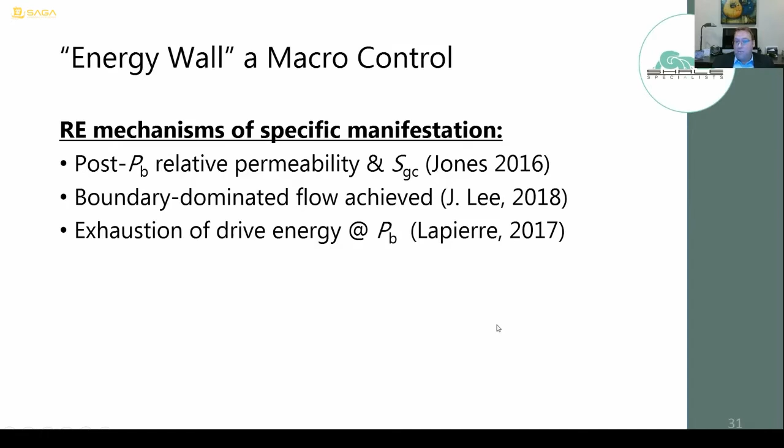Now, the energy wall - the law of conservation of energy - is really a macroscopic picture. It doesn't tell us what actually has to happen, just that something has to happen. But if you go through the various iterations, there are plenty of reservoir engineering mechanisms you can model that produce this result, such as post-bubble-point relative permeability at critical gas saturation issues, or achievement of boundary-dominated flow, or, my personal favorite, exhaustion of primary drive energy at the bubble point. Either way, these provide what is absolutely required by the universe: the GOR trend has to lessen and/or the oil decline has to worsen.

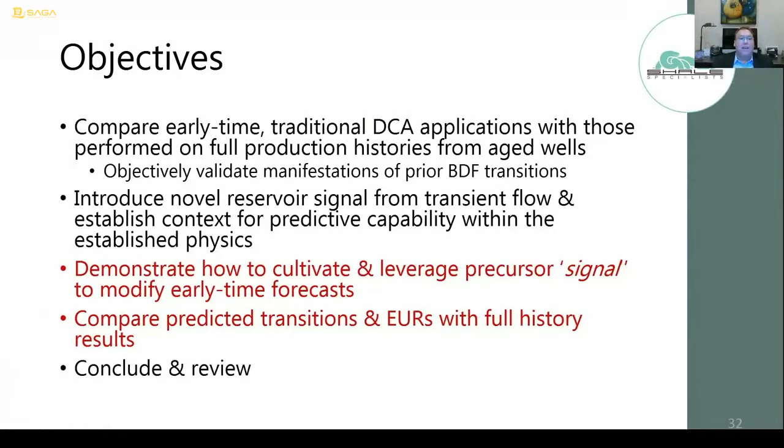So now let me demonstrate how to cultivate and leverage this precursor signal of breaching the energy wall to modify an early time forecast, and then we'll compare the results.

And this compares quite well to our 27% that we observed on day 772. Now that's not super close, but the good news is these two models' error is within 3% of each other. This suggests that if we can reliably forecast GOR into the future, we might have a way to sanity check our initial hyperbolic decline forecasts against breach of the energy wall, to predict a transition to boundary-dominated flow and greatly improve the accuracy and reliability of our early time forecasts.

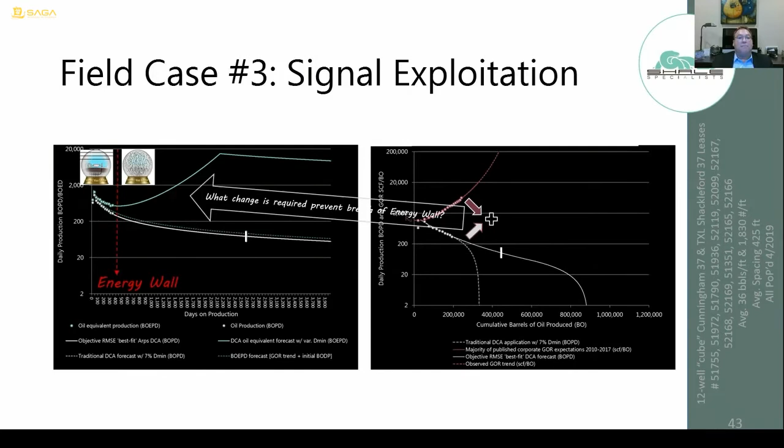The only thing that we can do from a DCA perspective is to invoke boundary-dominated flow on day 421 with a minimum decline of 56%. That compares really well to our actual boundary-dominated flow of 60% on day 388, and again the two models are within 5% of each other in terms of error. So again, it looks like if we can forecast GOR into the future reliably, we would have a new tool to modify our early time forecasts to improve their reliability.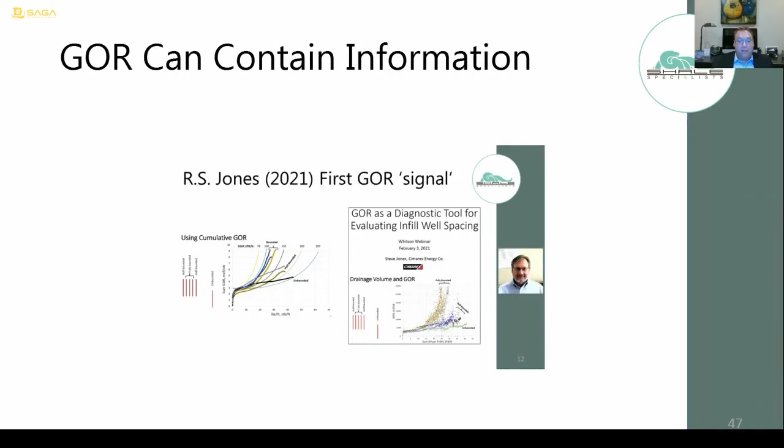So now let me conclude and review. I hope I've demonstrated that GOR escalation at boundary-dominated flow and at bubble point is perfectly consistent with known reservoir theory. And I hope I demonstrated that I'm not the only one to propose that a signal from GOR during transient flow periods may be able to tell us something about the boundary-dominated flow period — that honor goes to Steve Jones. And I hope I demonstrated with the cases I selected that the observed boundary-dominated flow transitions that have already objectively manifested are exceptionally coincident with breach of what I've introduced to you as the energy wall.

So the next big question on everyone's mind ought to be: how reliably can you forecast GOR into the future? Unfortunately, we've run out of time, so I'm not going to be able to talk about that. But I will share briefly some observations from my 5 years of continuous practice of this technique.

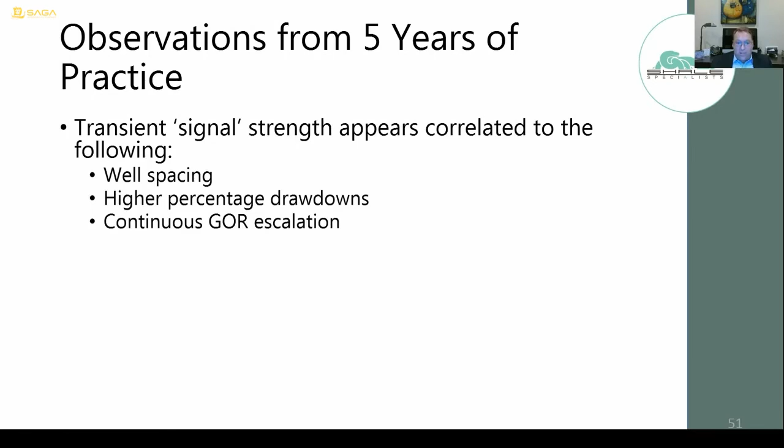First of all, the transient signal strength, this clear impending breach of the energy wall, is highly correlated to well spacing, higher percentage drawdowns, and continuous GOR escalation. Also, the bigger the B, the better — when you have strong hyperbolic initial declines with any sort of escalation in GOR, the future indication of a breach of the energy wall is quite obvious.

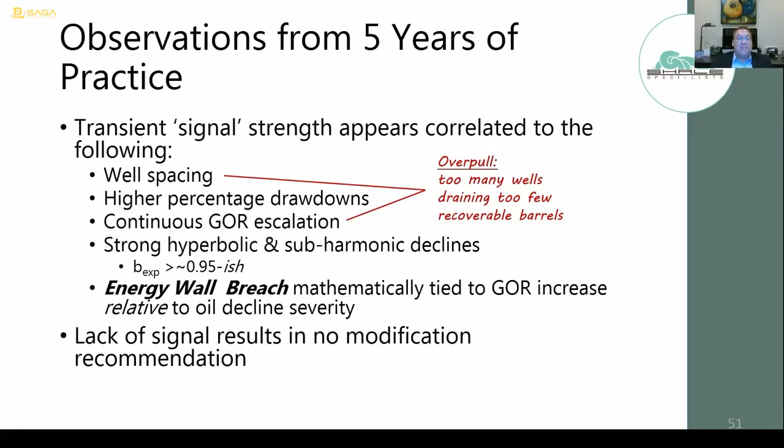Now, the good news is that a lack of a signal of a clear breach of the energy wall simply results in no modification to the forecast. In other words, you're simply left to the devices you had before and do whatever it is that you did before.

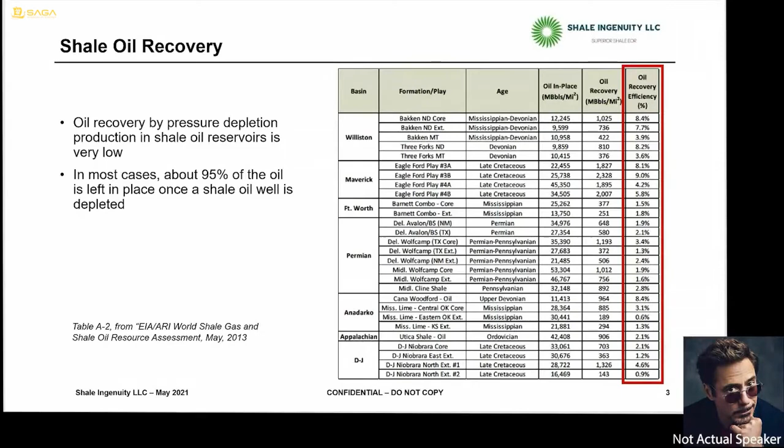This table here is from a report done by Advanced Resources International for the EIA back in May of 2013, and it shows the estimated recovery factor for a number of different shale plays here in the United States.

Shale oil EOR in the United States is in its infancy. The Eagle Ford Shale probably has the most EOR projects permitted to date, 33 separate projects permitted with the Texas Railroad Commission by 9 operators. Of those, EOG is the dominant operator with 17 of those permitted projects involving 178 wells, all under natural gas huff and puff EOR. They began in 2016, and then they've since added wells each year through 2018. Their incremental recoveries have been estimated to be 30 to 70%.

There's been a number of SPE papers written on this that forecasted incremental recovery. However, we've also had reported problems with interwell communication, with gas traveling down fractures that communicate with offset wells, and that prevents sufficient pressure buildup, reduces oil recovery, and adds to the cost.

In the Permian, there are 6 EOR projects that have been permitted by 4 different operators, and of those 4, Pioneer and Oxy's projects have not yet been implemented.

In the Bakken, there's been a number of pilot scale CO2 injection tests, huff and puff tests, and most recently, Liberty Resources did a natural gas huff and puff EOR project in one well in 2019, but they had to delay it due to a lack of gas supply. Amerada Hess did a single cycle propane injection test in a well in 2019.

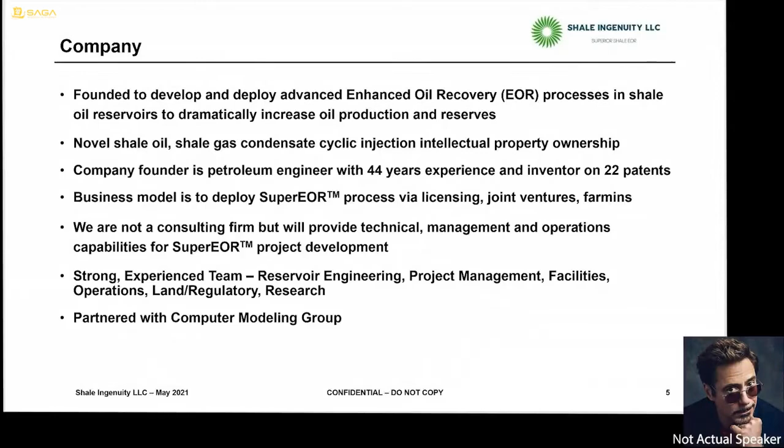So some of the features of Super EOR are that, of course, much higher oil recovery than natural gas or CO2 huff and puff. We use an optimized blend of a low-cost, simple solvent. It's adjusted by cycle based on ongoing compositional reservoir simulation modeling to maximize oil recovery.

This solvent blend requires a much smaller volume to pressure up. It's lower cost than natural gas, can be trucked or piped to the well pad, and is fully recoverable. You only buy it one time.

It's injected into the well in a liquid state using a triplex pump. No compressors required, uses far less horsepower to do that. You inject to a designed surface injection pressure, and the bottom hole temperature will heat the injectant and raise the bottom hole pressure. And then on the flowback, the production and the injectant are recovered in a surface equipment package where the injectant is stored on the pad for re-injection.

This gets you much higher oil recovery per cycle with shorter injection cycles and a shorter overall total EOR time. The shorter cycle and higher viscosity liquid injectant provides better control over the injectant displacement, and we can also operate this at a much lower maximum bottom hole pressure and still have excellent oil recovery, meaning much lower chance of interwell communication.

The environmental benefits of Super EOR are many. First of all, at least 50% lower greenhouse gas emissions versus primary production on a per barrel of oil basis. 75% lower water consumption and production, 75% lower capital investments, 50% lower operating expenses. Again, all-in cost per barrel is about $15.

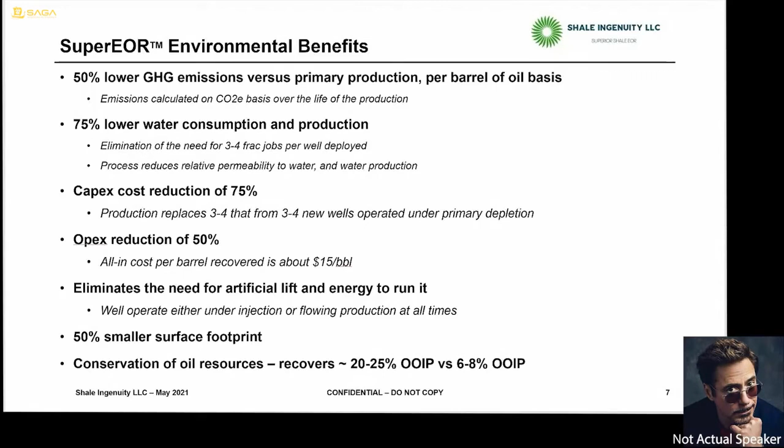The solvent is recovered, stored on location for re-injection. Oil goes to the tanks, gas goes on to the midstream. I'll also point out this is very controllable, very scalable.

I'll also point out that we also recover a lot of additional gas through Super EOR. I don't account for it in our economics, but it does produce a lot of additional gas that would not be otherwise recovered.

Now in the Eagle Ford, we've been working with a company called EP Energy. They have 2 natural gas huff and puff EOR projects there. They also had one in the Permian, Wolfcamp. In their northern project, which is in the volatile oil part of the reservoir, they estimated their natural gas EOR recovery might be as much as 75,000 barrels per well based on their H12 filings. When they got out in the field, though, it didn't quite turn out that way, and I'll explain here in a second.

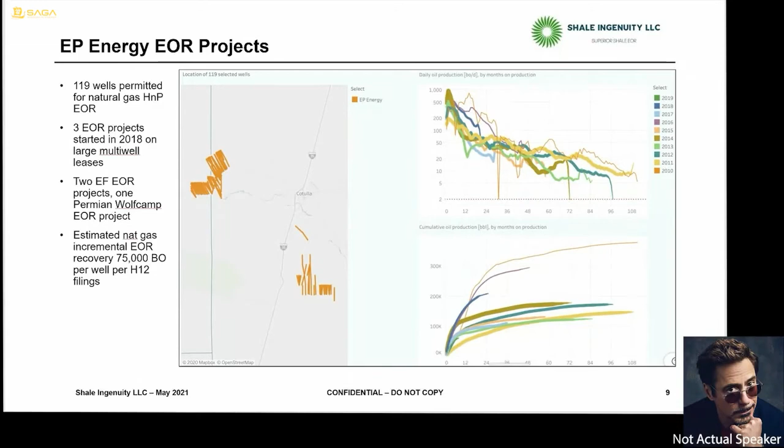This project was located in northwest LaSalle County. It was a 3-well natural gas huff and puff EOR project in the volatile oil window. This was described in several technical papers and modeled with CMG GEM. They got a match on primary production and pressure history, then got a match on their natural gas huff and puff EOR performance. We used that model to forecast Super EOR performance.

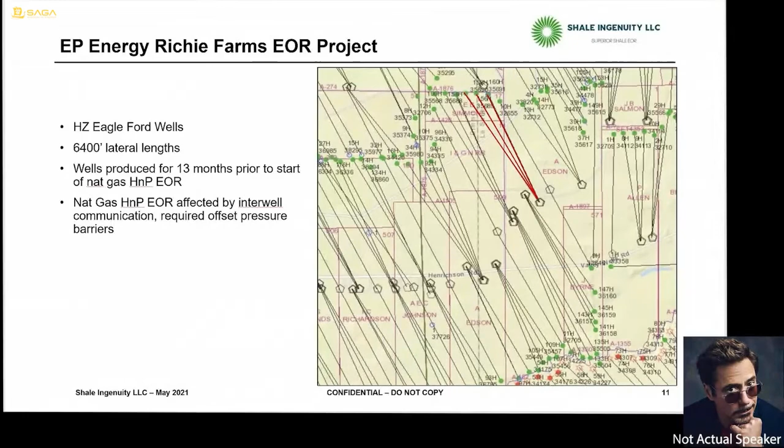However, once they got going, they realized they had interwell communication, which required them to provide pressure barriers by pumping water into the 2 outside wells and just injecting into the center one. This was described in an SPE paper. The containment they conducted, pumping water into the 2 outside wells with a 3,500 PSI pressure barrier, allowed them to increase their oil recovery from a 7 to 12% range to 20 to 30%.

That's extremely important when you consider that there are a lot of wells out there that have interwell communication, which they found out either through natural fractures or during the frac jobs when they completed the well. So by being able to operate this process at a much lower bottom hole pressure, you can effectively achieve a very high oil recovery and basically operate these wells as independent reservoirs without having a loss of injectant.

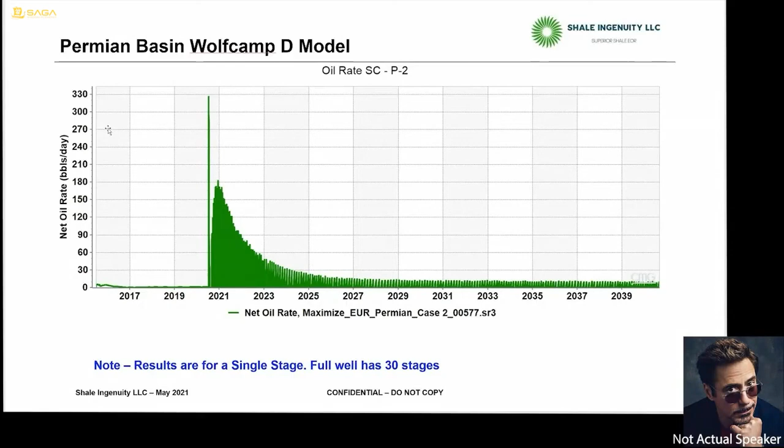We have also conducted core testing on Eagle Ford and Permian Wolfcamp shale cores to confirm the physics of the process and determine how it would work. I can report that after conducting these tests, which were 6 cycles of solvent injection and flowback, we recovered more than 90% of the oil out of these cores. It's remarkable how effective this solvent is at pulling the oil out of these shales. It truly is.

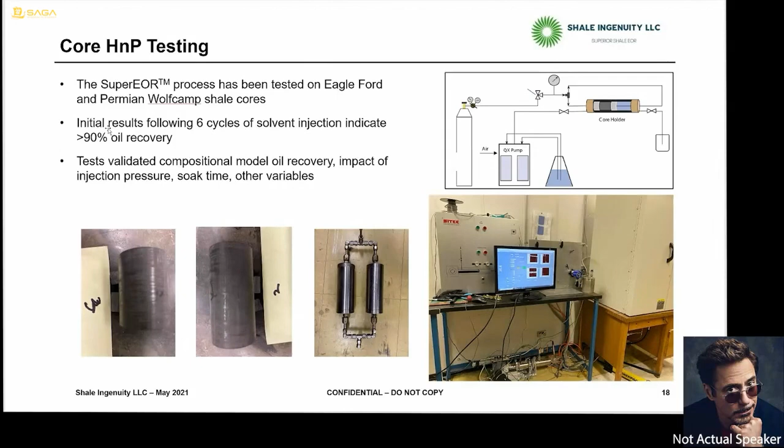What do the economics look like? Well, here's an example from the Eagle Ford where we modeled a 16-well Super EOR project. We assumed a $40 oil price with a $5 basis differential.

The process, again, was just unoptimized. We assumed injection and production time. The project economics were based on 10 years of operation, although I will tell you this process is still very economical after 10 years. But for financial reasons, we just decided to cut it at 10 years.

You can see the rate of return is over 100%, ROI is in excess of 4, and the cost per barrel of oil recovered is about $13. So it's remarkable economics. We think this would be something that should be of great interest to the shale oil industry. That's a great way to drive the cost down, reduce your greenhouse gas emissions, and triple your oil recovery.

We have patents covering this. As I mentioned earlier, we have 2 patents and some additional patents and trademarks pending. We have issued patents broadly covering cyclic natural gas EOR in shale oil and shale gas condensate reservoirs, and additional patents pending both at USPTO and WIPO.

We have a contingency agreement in place with our IP counsel to protect our IP ownership and to prosecute infringement of our patents. We hope that doesn't happen, because we're going to try to license our patents broadly and under very reasonable terms so that we can enable shale oil producers to access this technology and to their benefit, and at the same time discourage infringement.

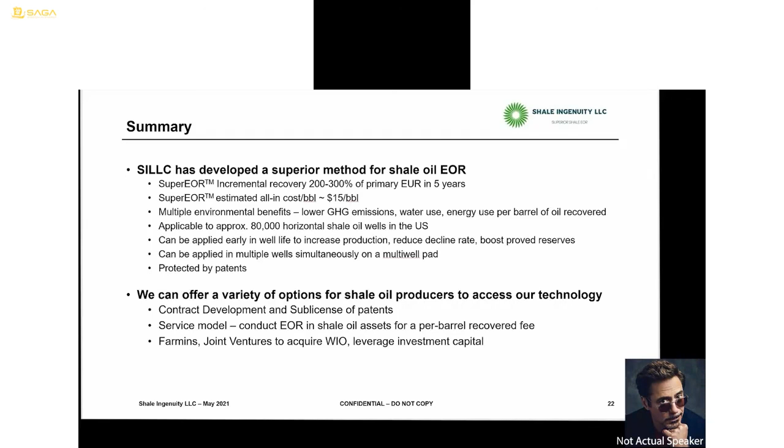We think this is game-changing technology. We think it can really help the oil industry with this, drive the costs down, make us more competitive on the world stage, help the economics for operators to operate their assets, and then also drive down the environmental impacts of shale oil development, which is very important. Thank you for the opportunity to tell you a little bit about super EOR and Shale Ingenuity.